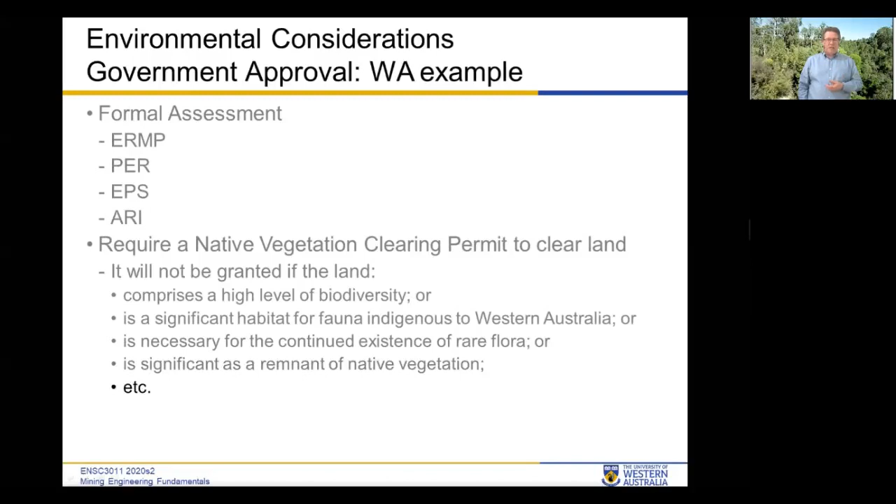Similarly, in Western Australia, you have a licence to operate, which is renewed by the government every year. So you have to report to the government what you've mined, how much water you've used, how much waste you've dumped, and how much land you've rehabilitated.

Now let's look - so the whole area of government approval, the environmental side of things, is an enormous area. I'm not going to get into that at all. Let's look at some of the aspects of the environment that you have to worry about when you're designing and operating a mine. One of the things is surface water.

Anywhere in the world will occasionally get rainfall, and that will form creeks and rivers and so on. And obviously, if you put a mine somewhere, there will be creeks and rivers going through it. So you don't want to have your infrastructure or your pit flooding.

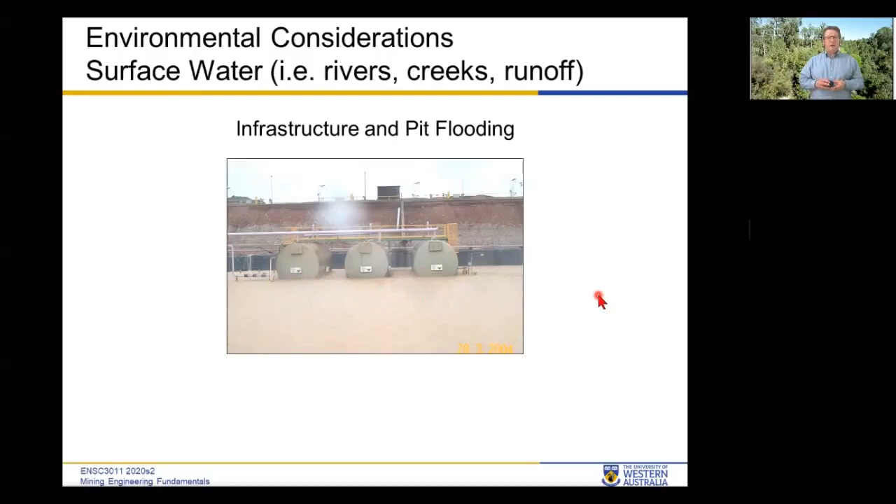Here's a picture of that brand new dragline which I mentioned in strip mining that Ensham Resources bought in Queensland, and about a year after it was bought, it was flooded. The river up there had an embankment, but obviously the embankment was not big enough for that particular storm, and it flooded. Then Queensland, 3 years later, had another series of really significant floods, and this is a mine where you can see that water has actually breached and is going into this large open pit, whereas this is the strip mine.

So the consequences, financially, are enormously significant. Could mean, see the trucks there, could mean make or break. This would have taken, I don't know how many days or weeks to drain, and then you can't just switch it on again - you've got to take it apart, dry out all the parts, check all the electrics, etc. So you lost production for, I don't know how long, maybe 6 months. So millions and millions of dollars. It was covered by insurance, but even so, it's not what you want.

I mentioned they did have an embankment again along the river, but it wasn't big enough. And that's one of the issues with climate change - we always try and design for a 1 in 100 year storm event, but we seem to be having a 1 in 100 year storm event every few years. So with the climate, we can't just rely on past information. Plus, we don't have past information very often.

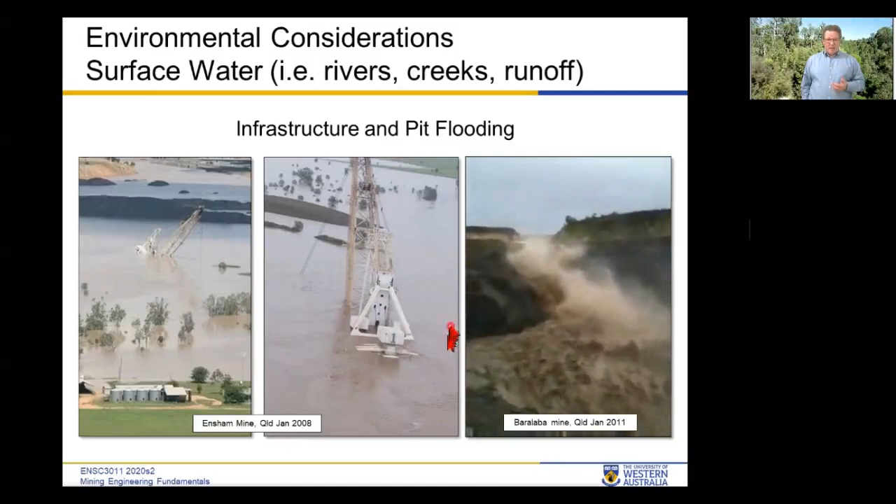Another type of water is groundwater. Surface water is the water you see on the surface. Groundwater is water inside the rocks, if you like.

If you dig a hole anywhere in the world, once you get below the groundwater table, you will get water seeping into the pit. It won't necessarily pour in like a waterfall, it depends on the geology. There's a whole field called hydrogeology which helps predict how much water will flow in, because it's not just rock types, it's to do with porosity, permeability, fractures and all sorts of things. We need to get a rough estimate from the hydrogeologist of how much water will come in, and then buy a pump significant enough to cope with that.

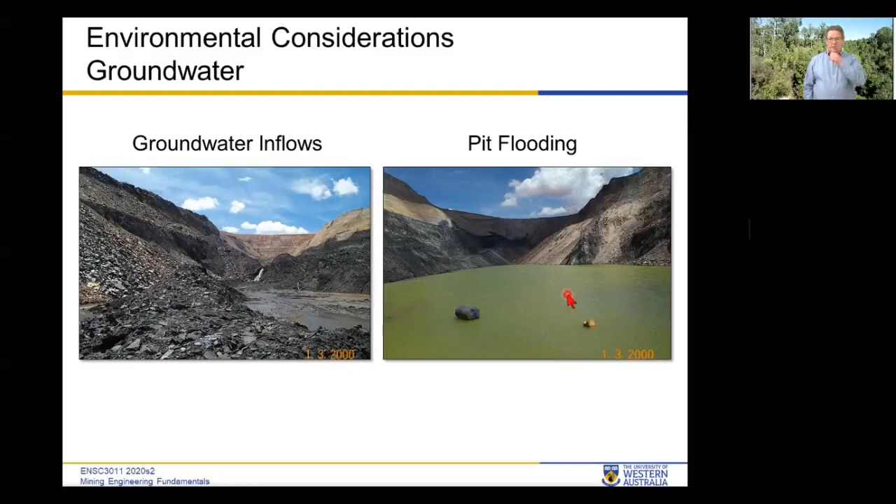You don't want your pit flooding and damaging your equipment. That's one reason why you never only have one pump, in case one pump breaks. It might take a couple of days to get replacement parts, so you don't want that to happen. So that's just a pumping strategy.

You can also de-water the mine, which means you drill boreholes around the mine, put pumps down there, and pump out the water, reducing the overall water table so you don't get this seepage. The water you pump out is usually recycled to the groundwater or used in processing.

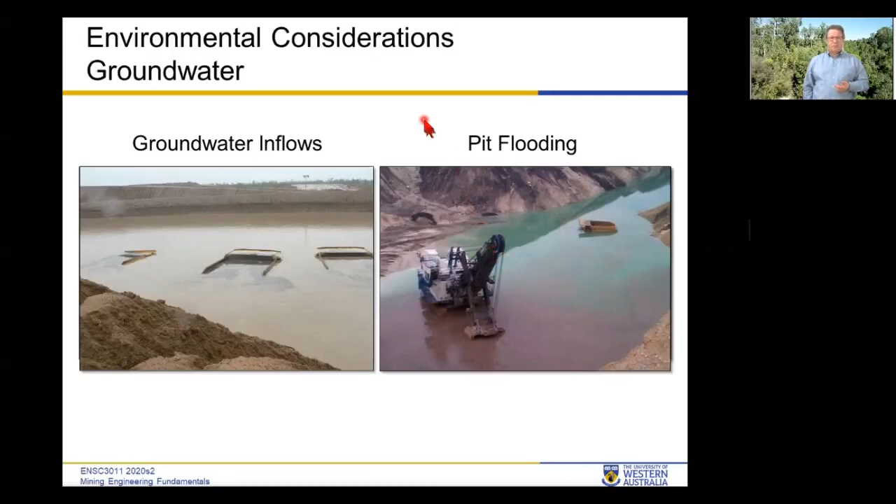Not sure if you can guess where that is - nice green area, there's the ocean there. This is the Waihi mine in New Zealand, North Island.

It's a bit like Kalgoorlie in that they discovered gold 100, 150 years ago. They mined gold, the town grew up around the gold mine, and now the town is complaining about the mine being there. Similarly to Kalgoorlie, it started off underground and now it's gone open pit, and they're pushing the pit back. Apparently that there is the main road, main street.

If they push the pit back any more, they would really encroach on the main street, so from a public relations point of view, they don't want to do that. They have done it previously and bought houses around. So from the public relations point of view, they'll go underground in those woods there and carry on mining deeper.

When they were mining this in an open pit, because you're so close to the town, you do have to worry about things like the noise of the equipment and vibration from blasts. The issue, of course, is the rules and regulations about noise and vibration, but people will complain about a lot less than the regulations allow.

You could say, well, the regulations say we're within limits, but from a realistic public relations point of view, you have to cater for people who will hear noise and don't like it, particularly at night. So they turn off the beep-beep-beep reversing alarms on the equipment, because that could be really annoying if you're trying to sleep in that house there.

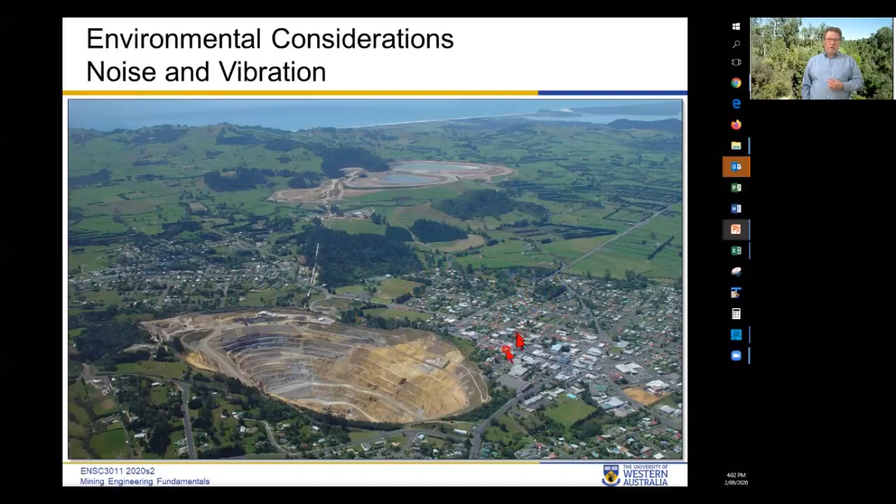Dust. You will get dust, particularly in dry parts of the world. I mentioned before, in WA you have water carts which drive around the mine just to spray water to reduce the dust, but obviously that's not perfect.

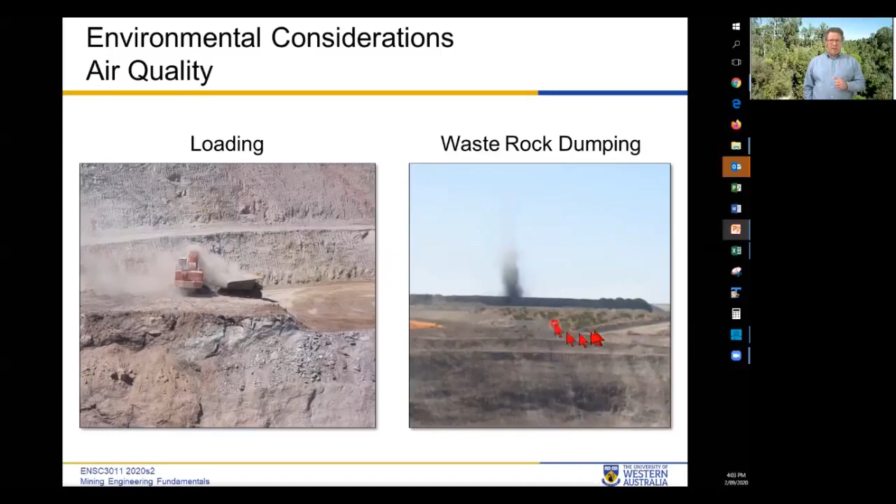Here you wonder whether the operator can really see what's going on. Sure, she or he is fine in an air-conditioned cab, but I'm not sure they've got such a good view of what's happening. And here's, I think, some sort of waste dump with a bit of dust there. That's not particularly an issue, but if you get winds and it blows onto town people nearby, they won't like that, so it's something you need to worry about.

We are clearing the land, removing topsoil. As I mentioned in surface mining, in strip mining, one of the keys to successful rehabilitation is the fact that you pick up the topsoil and move it and use it the same day or very quickly, before all the bugs and enzymes die. In an open pit environment, you don't really have that luxury, you usually have to store the topsoil until rehabilitation starts.

You have to take an audit of the flora and fauna on the land before you mine, so you can prove afterwards you've got the same number of plants, kangaroos, etc. as there were before.

Then what do you do with the overburden and waste rock? In an open pit, you traditionally mine the waste and put it in a large pile called a waste rock dump, which nobody likes, so we changed the name to call it a rock storage facility, but it's still a bit of an eyesore. Some people even call it now a landform.

One of the points is this is a permanent structure. It's going to be there after your mine's finished for thousands of years. So it's not a temporary thing, it's going to be there for a long, long time. So it has to be stable and acceptable in appearance and vegetation to the government.

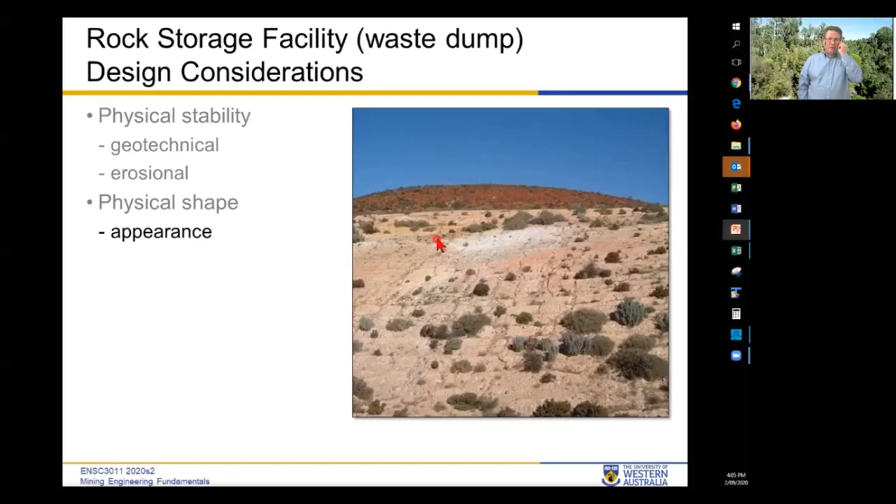So the appearance does matter, and whether you shed or store the rainwater. I'll just draw what I mean by that. The establishment of vegetation is impacted by whether you decide to shed or store. If you store, you tend to get more vegetation growing. If you shed, you tend to get the vegetation washed away, but that's something you need to think about.

And of course, what vegetation? And the rules and regulations - you will have agreed with the government what the closure criteria are, so you need to satisfy those, which might be things like the number of plants, the pH, etc.

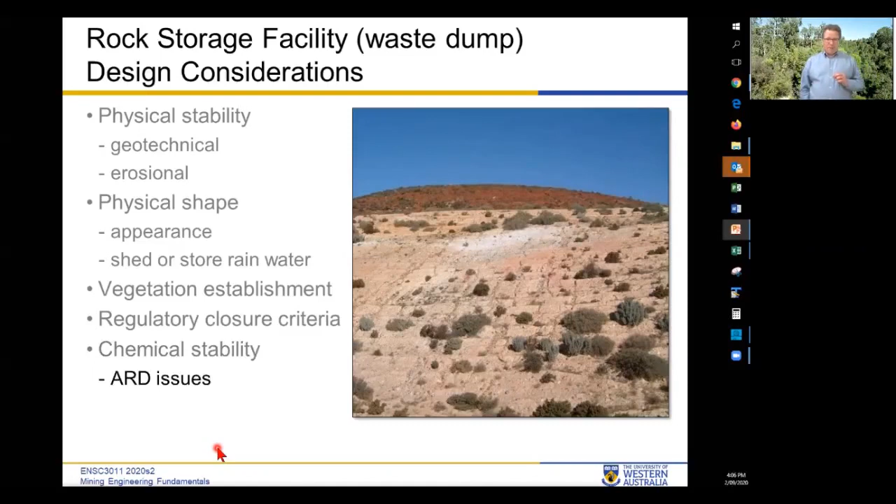The other thing you need to really worry about is the chemical stability, which is something called acid rock drainage. So acid rock drainage is sometimes called acid mine drainage. It's a chemical reaction of sulfides in the rock. Not all rocks have sulfides, but an awful lot do - and the pyrite in that, and then oxygen, which is obviously everywhere, and water, which is everywhere after rain.

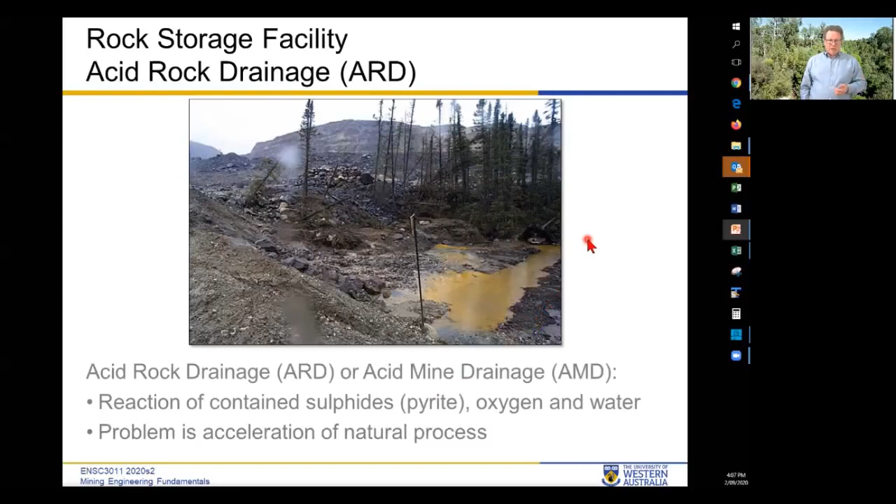It's a natural reaction that occurs, but because we've blasted the material, we've fluffed it up and introduced lots of air, so that oxygen and water can get into it, which just accelerates the chemical reaction, causing a very low pH liquid.

Which increases the metal solubility, so the acid and elevated metals cause environmental damage, which is a nice way of saying nothing grows. I've done a job at a mine in Northern Territory called Rum Jungle, where we had to clean up the mine site. It'd been left in the 1960s, I think - they just closed the gates and walked away.

And around the waste dump, nothing grew for about 500 metres. And this is part of the Northern Territory, which is very green and fertile. Nothing grew. The pH was, I think, 3.5 or something - so pretty nasty.

What are the solutions? Well, the first thing is to now incorporate this as part of your mine design. So in the exploration phase, we'll be looking at what rock types are potentially acid forming. In our waste, we'll have probably several different rock types - which ones are potentially acid forming? Not all of them are. We might even do some lab tests to find out.

If we've got some acid forming material, we can mix it with lime. That obviously costs money to do that. Or we can contain it.

So what you ideally do is surround the PAF material with non-acid forming, NAF material, so that the oxygen and water can't get in. Or you can actually buy membranes, like large tarpaulins, to put under it so the water can't get through.

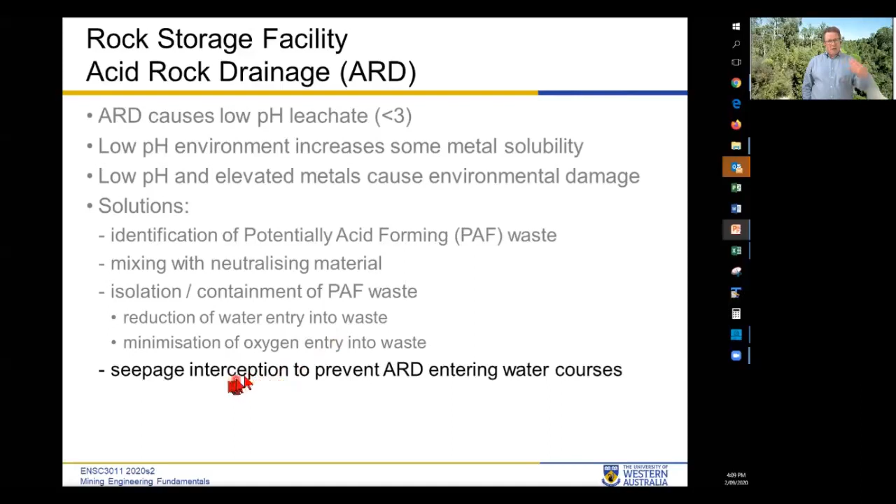And as a consequence, stop the seepage down into the watercourses. As I said, you can buy a geomembrane to sit underneath it, which is guaranteed to stop that water running through.

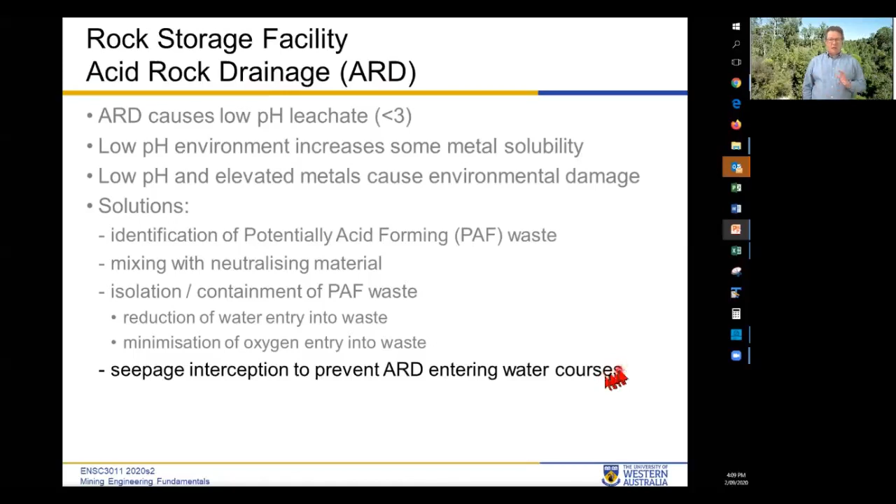The slopes of the waste dump - for pits we've been talking angles at 45 degrees, because they're not permanent things, apart from the final pit. Vegetation won't grow very well at 45, and you've got rainfall roaring down there, washing away any seeds that do grow. So the rule of thumb is somewhere like 15, 18, 20 degrees, depending a bit on where you are in the world, which means the waste dumps are a lot flatter, so have a larger footprint than if you built them at 45 degrees.

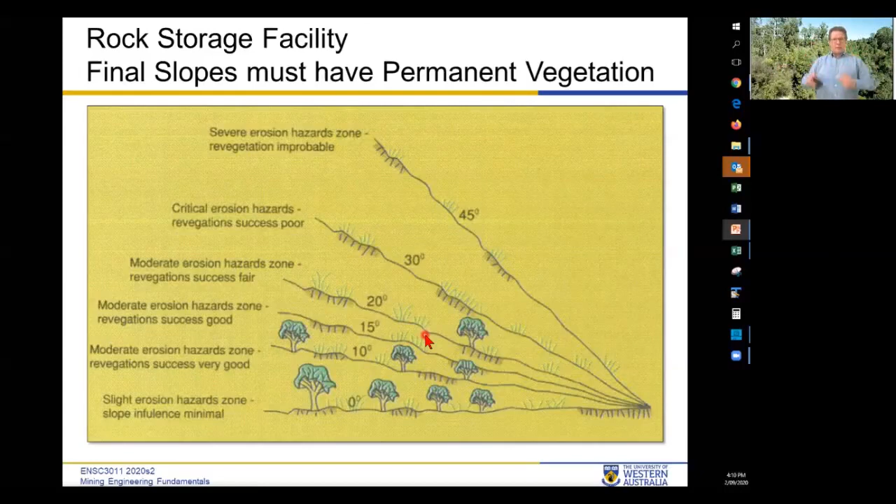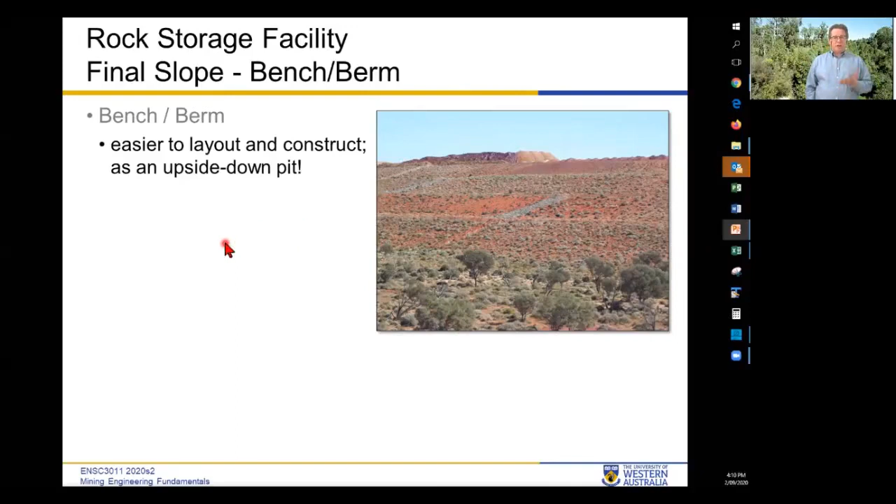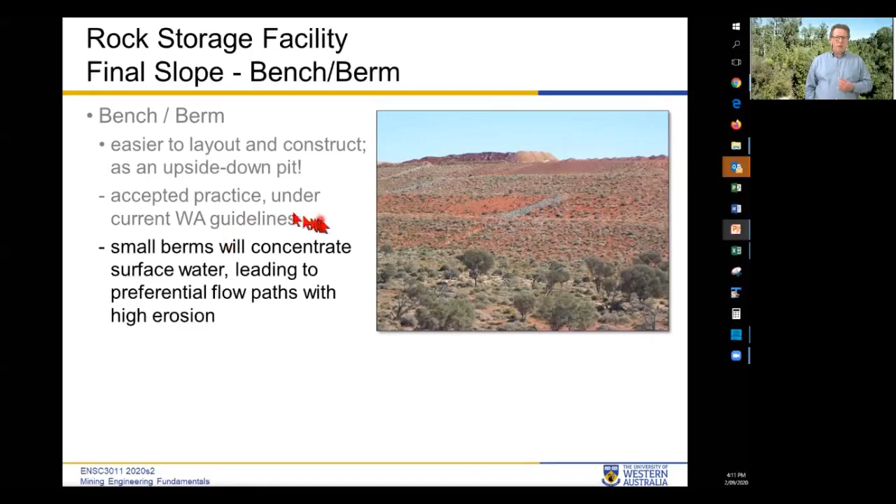So a bench berm design is a lot easier to lay out and construct because it's just an upside down pit, so we're used to it. It is an accepted practice under current government guidelines in Western Australia. One disadvantage, the berms will tend to pool the water, which in turn will lead to high erosion as the gullies go down, but conversely you get more vegetation growing where the pools of water are.

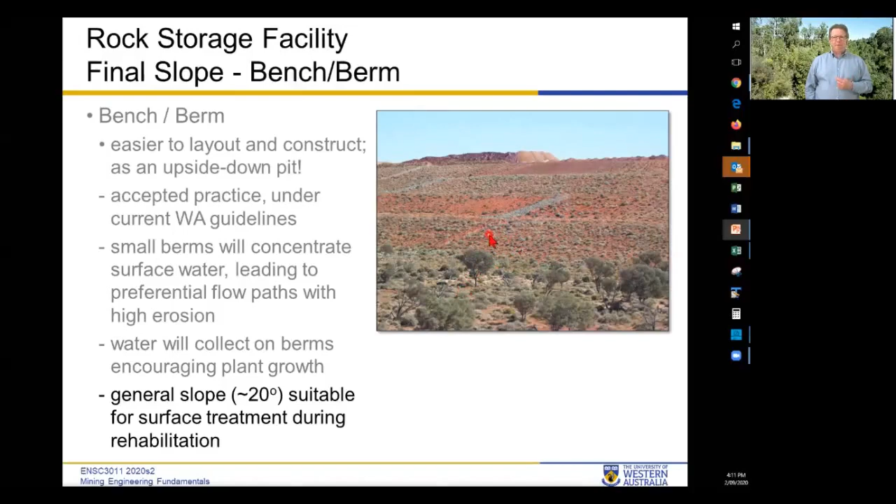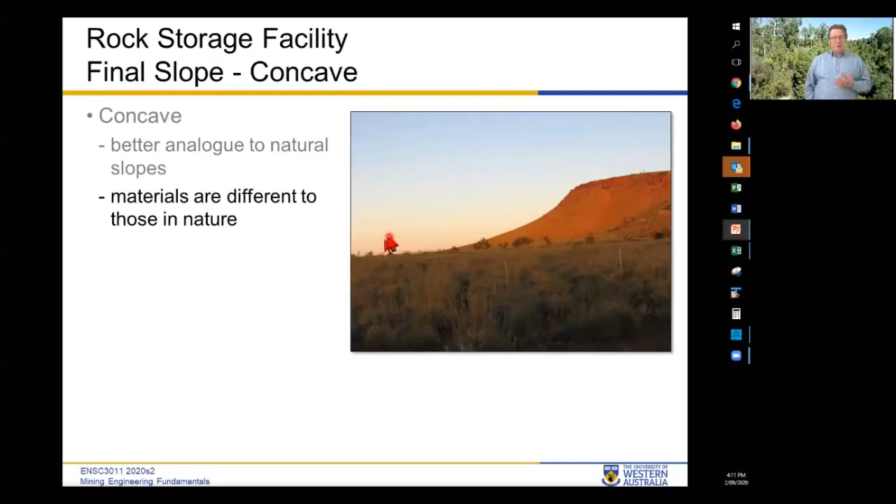General slope is 20 degrees. Then the much more complicated one, the concave, is more analogous to natural slopes, looks better, but the materials we're building it with are not what nature's built the natural slopes with. So we're trying to get a balance between the slope, the surface water runoff, and the velocities. It's much more complicated to build, and there's limited height you can build with these as well.

This one's a little bit better. You've got some vegetation growing on the berms where the water pools, but you're still getting some gullies forming along there.

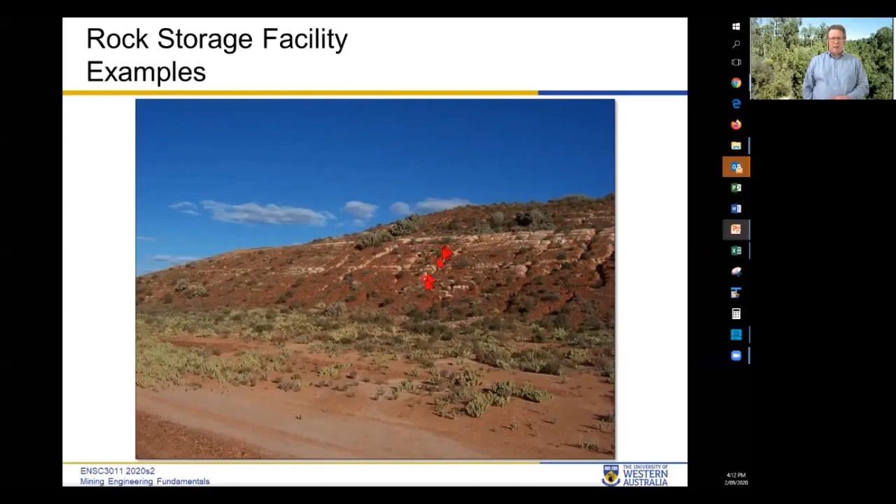This is what I call the donut waste dump. Traditionally, waste dumps just have waste piled up, and the pile gets bigger and bigger. This one you start from the outside and build it inside, adding to it on the inside. The advantage is the outside limit is fixed and will not change. So with a normal waste dump, it just gets bigger every day. This one, the outside is fixed, won't change, which means you can start to rehabilitate it, which is what they're doing there - they're putting some topsoil on there.

So the general public driving along the road here will be happy to see it being rehabilitated, and they won't see it growing every day because the growth is on the inside. The obvious catch with this is you've got to get your volume correct. If you don't, then you have a limited space - you can't extend it, and you've lost all your advantages.

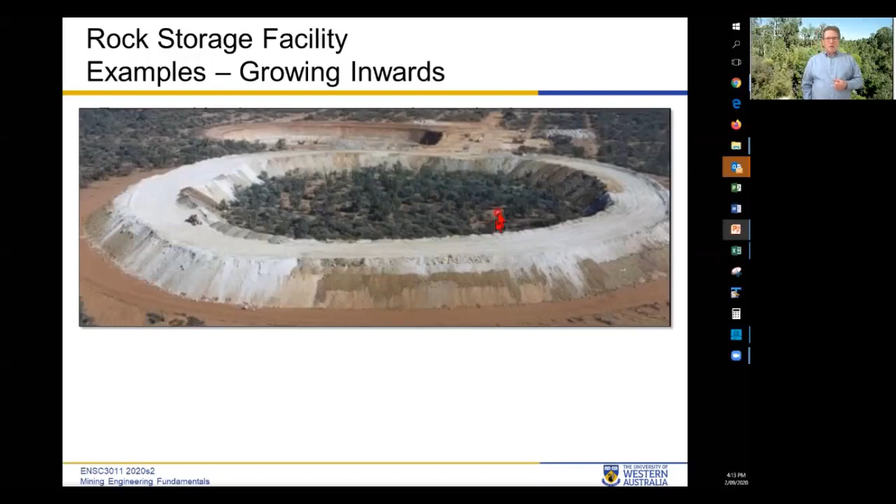Other impacts you need to think about: all undesirable waste materials must be isolated, removed, or buried as appropriate. Contaminated soil, drilling fluids, tyres, cement, human waste, chemicals, oils - you cannot really just pour it out into the local creek. So you have to contain everything in your mine area.

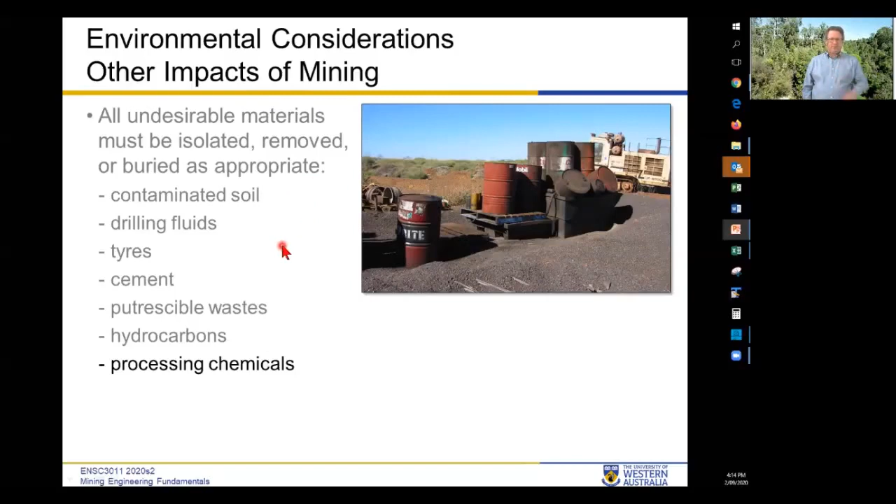Here's some images from an artist's view of the Waihi mine and the plan to rehabilitate the tailings. This is the actual tailings, which does have cows and grass growing on it. And this is a bauxite mine down south of Perth.

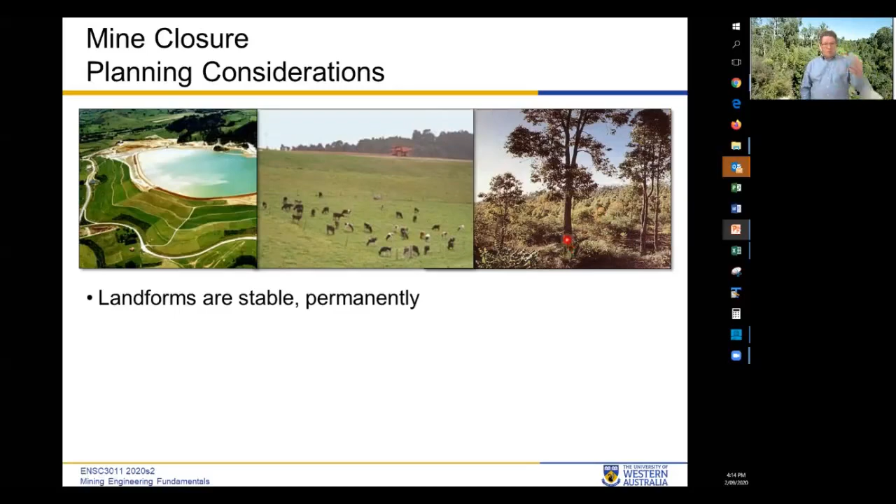The key thing is the landforms have to be stable permanently, for 1,000 years. Water and acid rock drainage are a major issue, and it should not affect the flora and fauna.

You need to remove the camp, roads, airstrip, everything, and leave it as good as, usually better than, it was before. With strip mining in Western Germany, they have mined, come across a town, picked it up, and carried on mining and rehabilitated.

You can see that that's the mine before, and they turned it into a recreational lake area, putting the town back roughly how it was before. And this video talks about that.

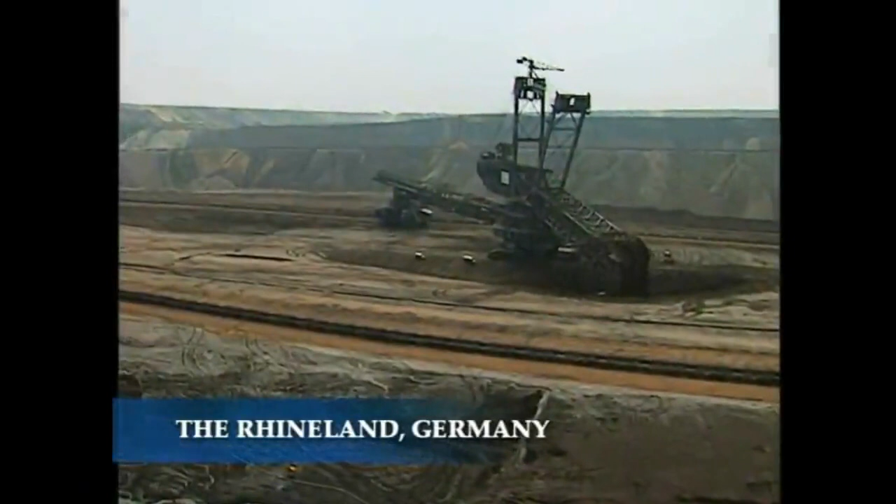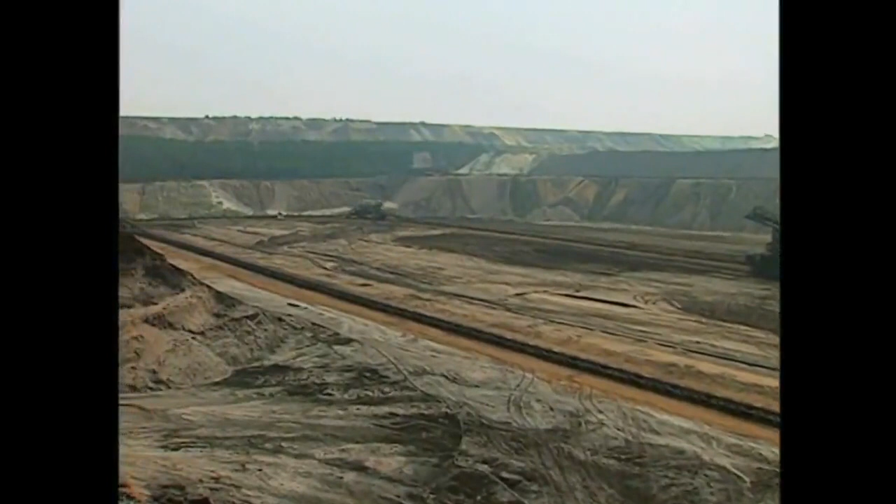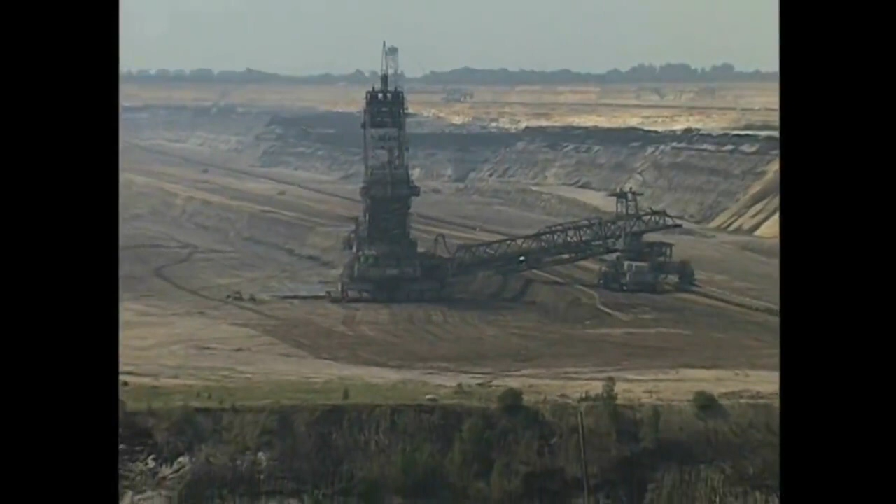Reclaiming the land after these open pit mines are closed has become an important issue all over the world. Germany has historically been a world leader in reclamation efforts. This is a densely populated countryside, and we are disturbing hundreds and hundreds of square miles of terrain, and it is only fair that the public demands that this gets put back to some good use.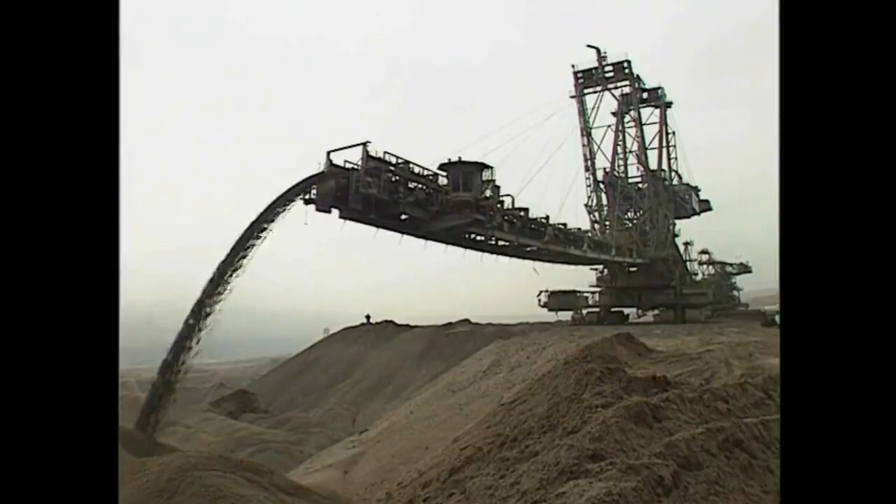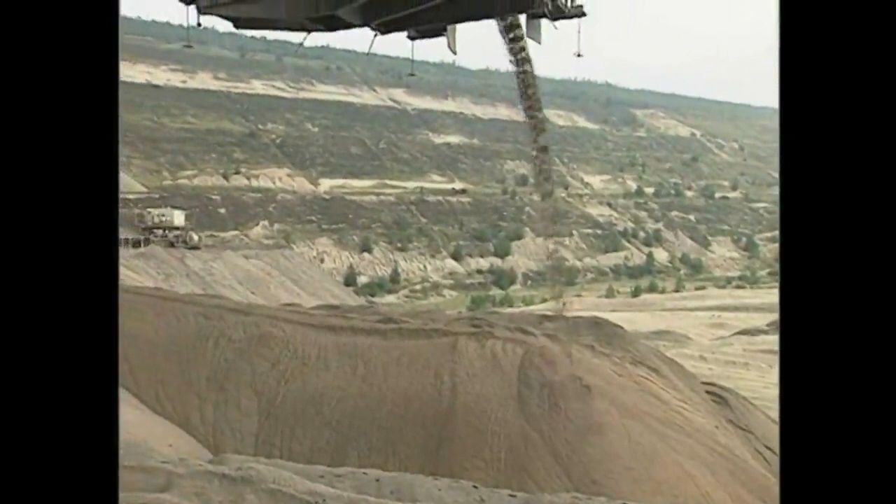The design of both the bucket wheel excavators and the walking dragline provides for refilling the pit as the digging progresses, a significant efficiency when it can be utilized. The location we are standing on was filled last night, and it will be buried under 30, 40, or 50 yards of material in the next 2 or 3 weeks.

But to actually restore the land to a thriving natural environment can take decades. There are two major conditions that make our reclamation so successful. The first is we have a type of soil found here in the Rhineland, which we use as topsoil in the reclamation, which guarantees high fertility.

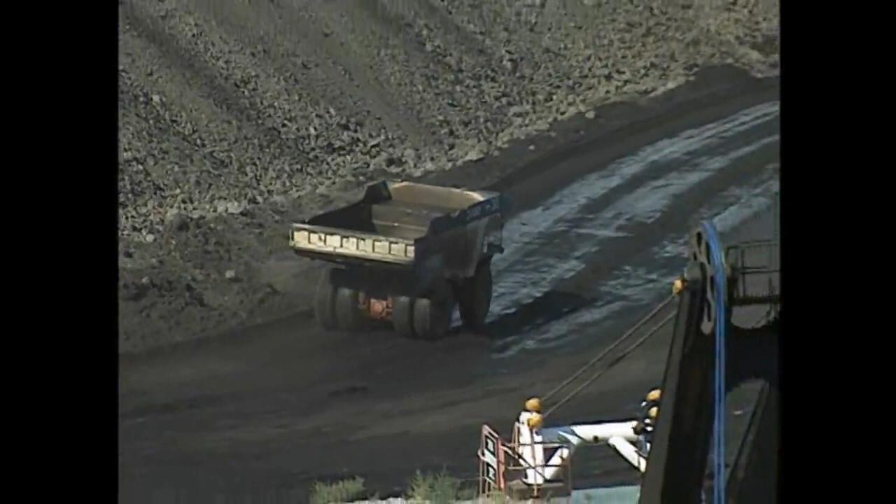Secondly, we have lots of experience and skill during the past 5 and 6 decades, and we're still learning to ever improve reclamation. In the United States these days, a mine operator can't even open a new mine without an approved reclamation plan to fill it back in when he's done.

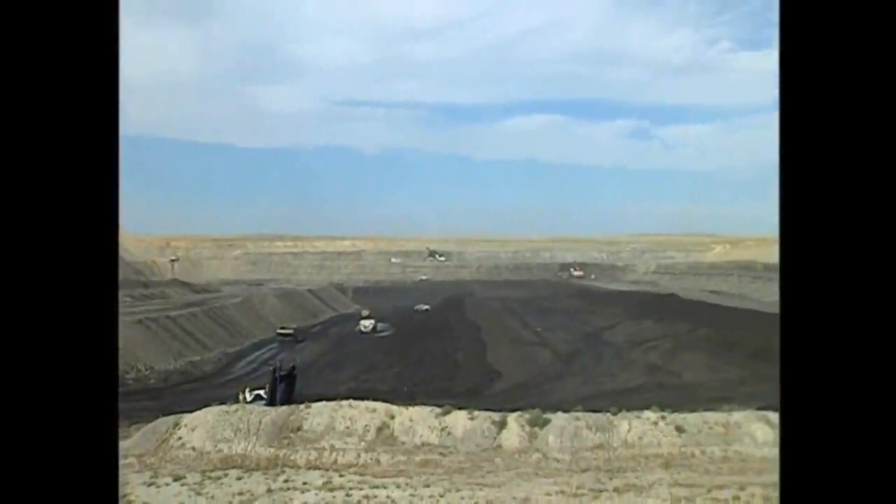The arid landscape of Wyoming is not nearly as lush as the German Rhineland, but it can be coaxed back to its natural state. Then it may remain wild or serve other human needs, such as farmland or development.

The scale of operations meant the whole community was picked up. So 35,000 people have been resettled due to mining operations in Rhineland, which is quite an achievement in a democracy to manage to do.

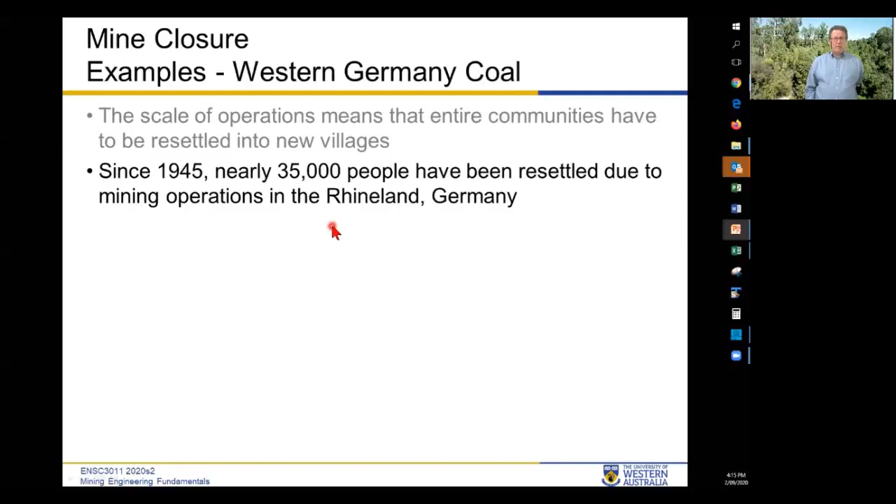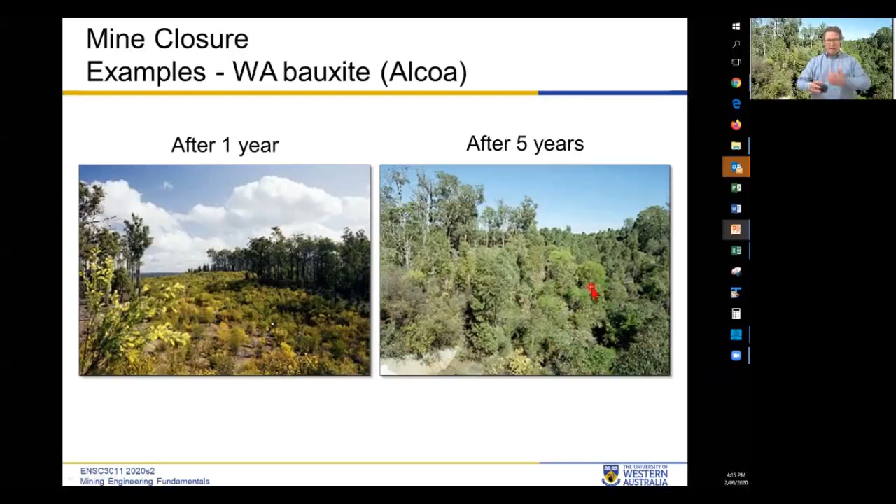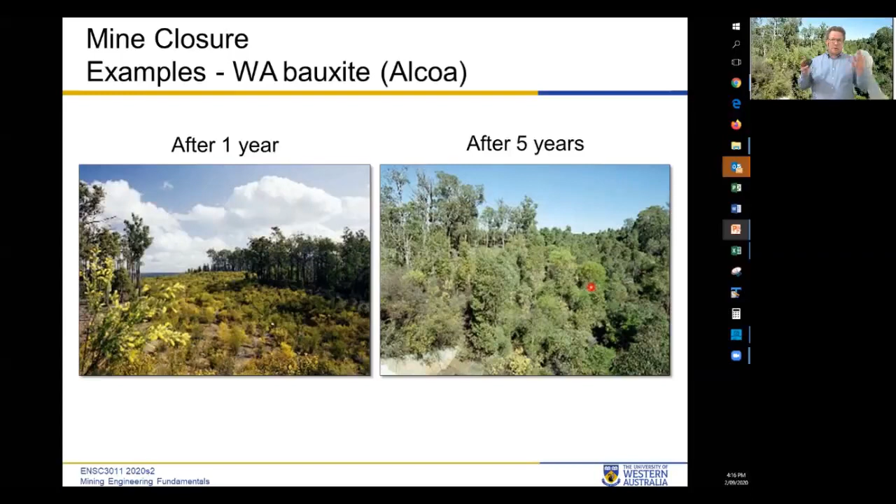A bit closer to home, this is bauxite mines near Perth. To the uneducated eye, that looks quite good. Of course, the problem is the area they mined through had trees 100 years old, so you can't really prove it's as good as it was before for 100 years. It's a long-term thing.

Here's another picture over a 5-year period. Again, it looks pretty good to the uneducated eye in terms of reforestation, but it's more than just the trees — it's the plants, the pH, it's everything.

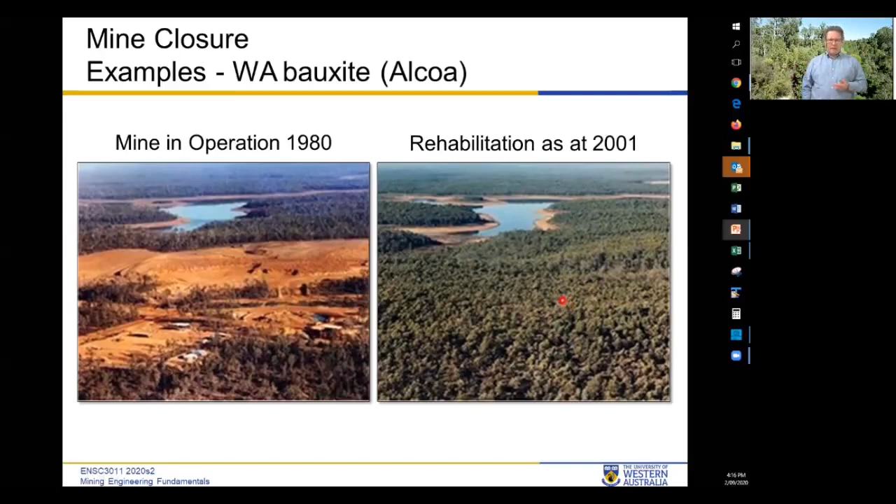You generally pay a bond to the local or state government in Australia, similar to if you rent an apartment — you pay a bond to the landlord. So if you trash the place, they've got some money to clean up. Same basic principle. Each government had slightly different rates, which vary between $10,000 and $50,000 per hectare of land.

Probably you paid that to the government at the start of the mine, and if something went wrong and you were left without cleaning it up properly, they had some money. It's probably safe to say that's not nearly enough for really bad conditions, 50,000. So the Western Australian government looked at a different scheme.

The other thing you have to think about is defining the measures — what constitutes acceptable closure — at the start of the mine, which is pretty challenging. You don't want to be in a situation where at the end you go to the government and say, we think it's finished, and they say, no, the pH is too high. You come back and say, we changed the pH, we think it's finished, and they say, not enough kangaroos per square kilometre, and so on. You need to agree on those things as measurable — pH, kangaroos per square kilometre, trees, etc. — before you start.

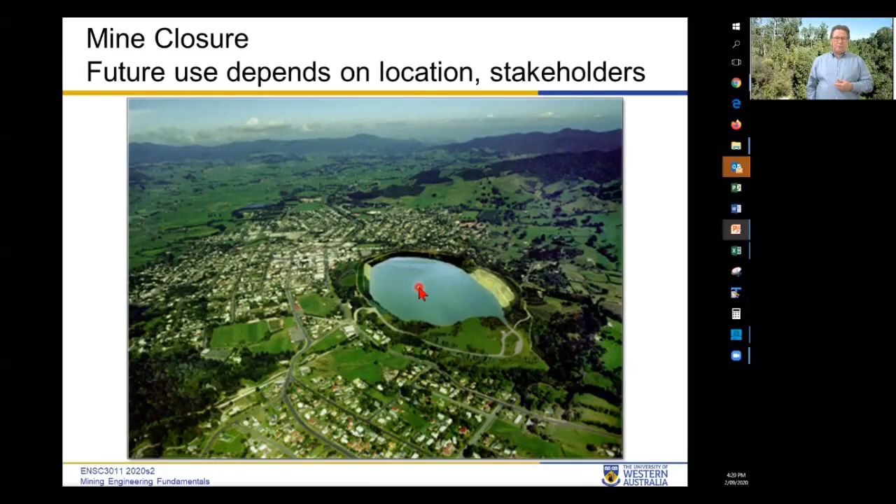So you adapt to where you are and what the local government says is acceptable. Here's an interesting one. This is near Shanghai.

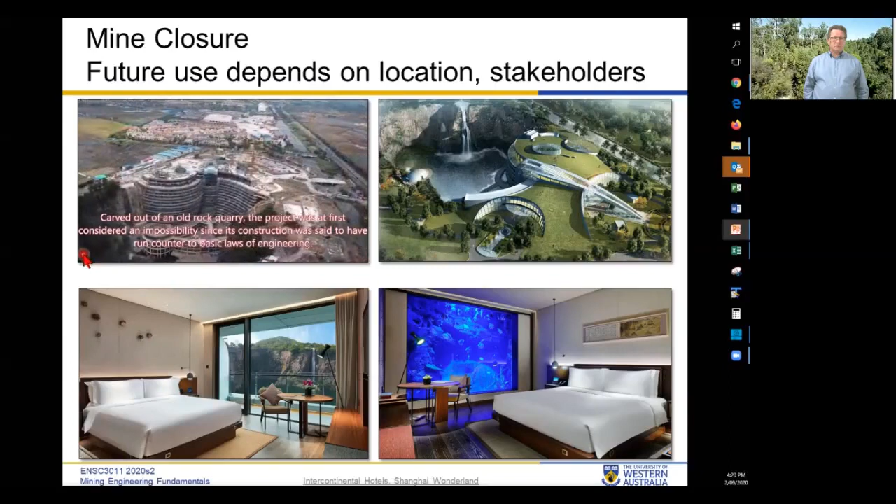So this is an old quarry, and they've built a hotel on the side of the quarry, and you've got some rooms above the water, others below it. I don't know if there's much price difference, which is preferable, and that's not the actual water in the quarry, that's the aquarium next to the hotel. Yeah, and it opened, I think, about 12 months ago, so if you go to the InterContinental website, you can book a room there. There are the prices, off you go.

Depends where you are. There's no point doing this in the middle of Australia because no people want to go there. This is near Shanghai, so there's literally hundreds of millions of people within a couple of hours, so it might work.

Mine closure requires negotiation with stakeholders, so it's not just something the mining engineer can say, oh, that's what we do. You've got to get approval from the people who have some say in that part of the world. So you've got to have all of their interests considered, whether it's farmers, native title holders, governments. And the difficulty for engineers is always dealing with non-engineers, people who don't think the way we do.